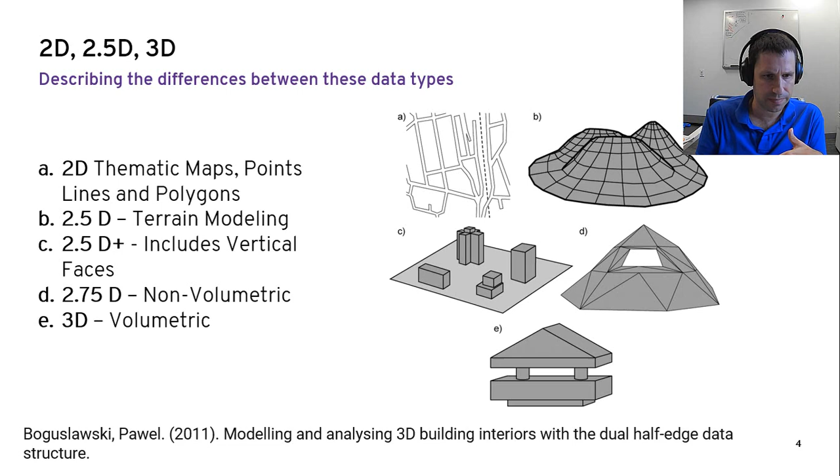Before 3D, think 2D. Imagine having parcel boundaries and just the edges. If you want to check for containment, you have to hope that you have clean data that connects, and two, connect the lines to form a polygon, and then do the comparison. Instead, if you had parcels as polygons to start with, you could compare that much easier. Now let's take this to 3D space.

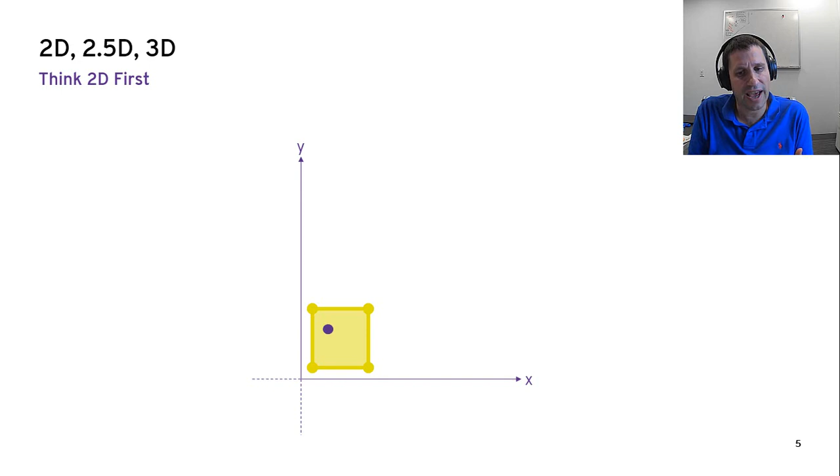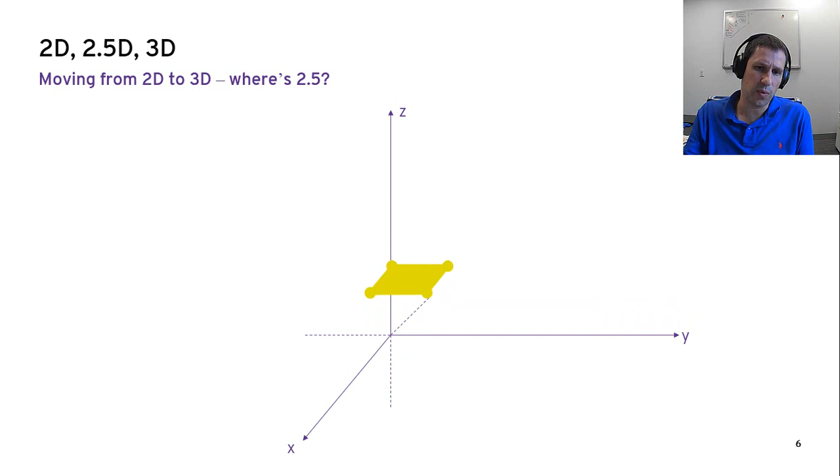Now instead of having parcel polygon versus boundary, imagine a building footprint. On the map, having it 2D is fine. You're looking at it from above. But if we want to rotate our perspective and visualize the building, we can give it some height. So we added a Z value. That is essentially what 2.5D is, a 2D feature with a Z value.

And sure, you can visualize the sides or even cap off the bottom. It looks good for visualizations and has many uses. It's enough for surface models, for example. However, it still has the containment and other feature comparison issues that the boundary-only model in 2D has. So if we had a point, say a 911 call, we'd have a lot of computation to find out if that point is in fact within that 2.5D shell.

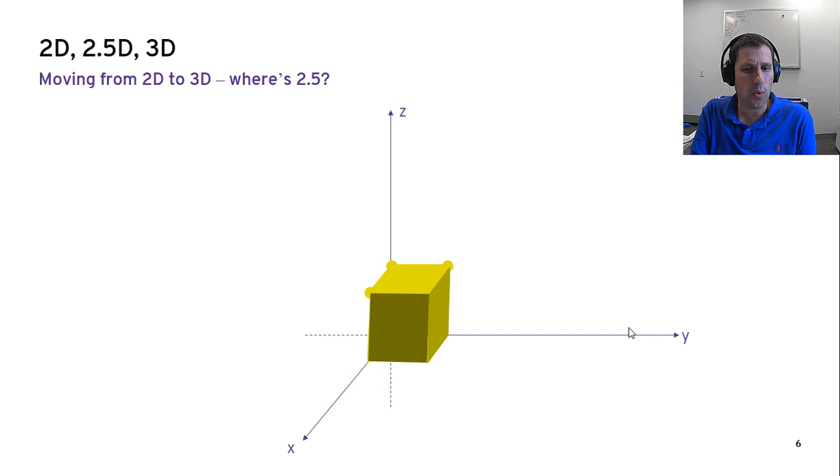That's where true 3D comes in. Full 3D allows for these sorts of comparisons and more complexity, like if we have overhanging roofs, rooms in buildings, and so forth.

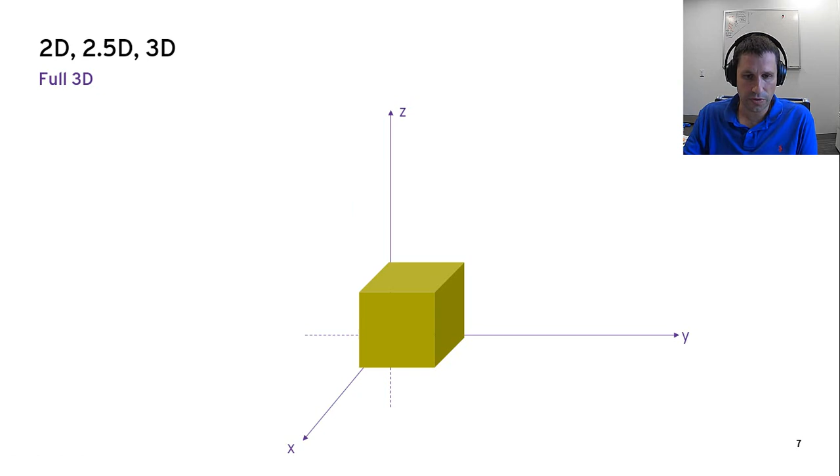Now that we've set the groundwork for what 3D is, let's step back for a second. As I mentioned earlier, 1Spatial has a background in data management, performing validation, integration, and enhancement of data. We work with many customers on complex data management challenges to support data supply chains within spatial data infrastructures or more complex conflation work.

1Spatial, as a global company, has been working on data management solutions for 50 years. While we are newer here in the US, we are growing rapidly supporting transportation, utilities, government, and facility organizations. One of our biggest growth areas is working with organizations like the state of Michigan, California Office of Emergency Services, Minnesota, Georgia, Arizona, and New Jersey, helping with data quality and integration of next generation 911 data.

Which leads me to the use case we wanted to highlight for 3D validation and inference. When we think of current addressing, we have an address point that may or may not be within a building footprint. We've done work helping organizations update the positional accuracy of their address points to actually be within a building footprint. However, what happens when you have multiple addresses within one building?

Organizations manage these situations slightly differently. Some organizations have stacked address points, meaning there are multiple points at the same location with the unit number identified in the metadata. Other organizations distribute the addresses across the building, which gives the map viewer a better idea of how densely populated a particular building is, or in some cases the system just requires the data to be in that format.

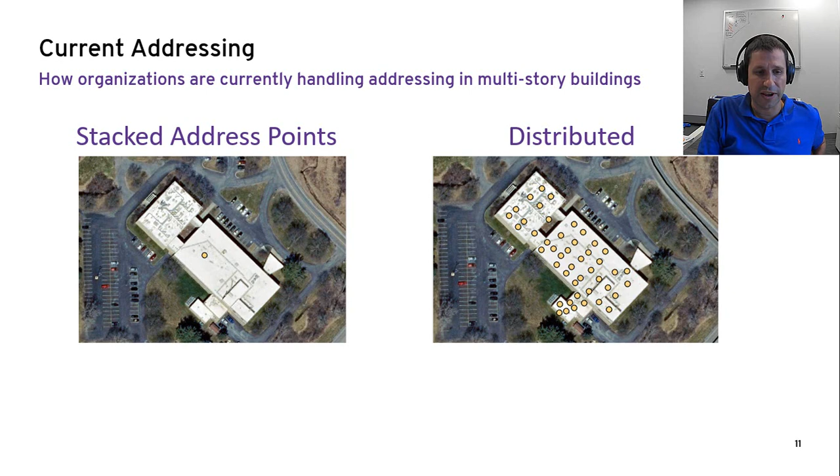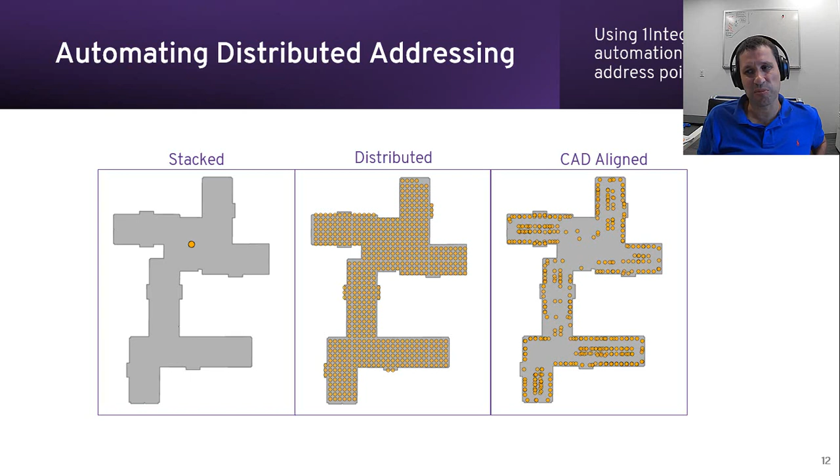You want to make sure the response team shows up to the nearest available entrance to wherever the emergency happens. That's where we can look at some as-built CAD drawings and integrate that with the GIS data in order to get an address point in a more realistic location. So let's talk about how we can automate that, and then we'll talk more about taking this to 3 dimensions.

What we want to be able to do, instead of just representing this as stacked addresses, is put it spatially where those rooms actually are located inside the building itself. Now, that data doesn't exist in the GIS, it exists in the CAD data itself. So let's go to the CAD system and look at the data there.

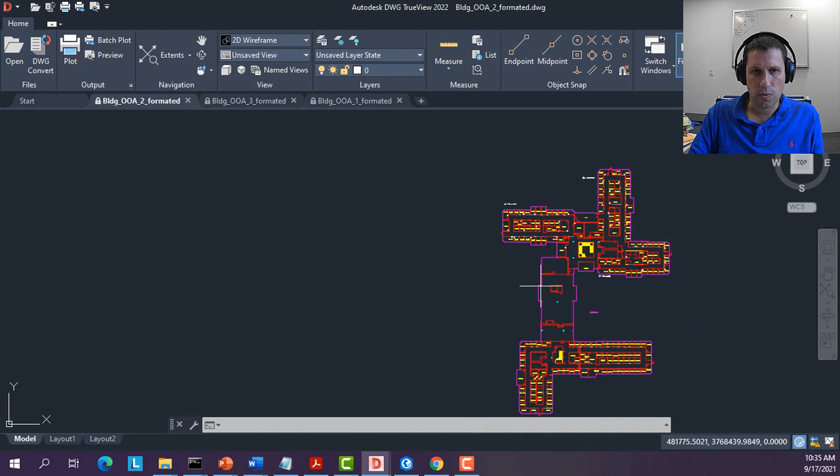So we're looking at our AutoCAD files. We have one for each floor, building floor 1, 2, and 3. If we zoom in, we can see inside that particular CAD drawing we have information on the room numbers, which should also reference back to those particular address points.

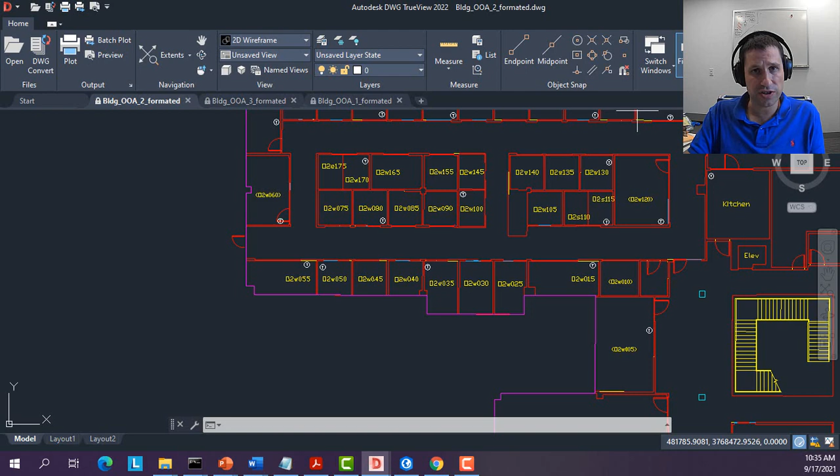Now what we're going to do is use the 1Integrate product to actually integrate these two different data sources so that we can update the address points to those particular locations. So let's flip over now to 1Integrate.

For those who haven't seen the 1Integrate application, we're on the Sessions tab, where we connect to different data sources. We can run a series of business rules against the data, either validate the data or integrate that data source. So I'll go ahead and hit play, and then walk through what is actually happening.

What we're doing is first bringing in the building footprint data set, that polygon. We're going to bring in some of the addressing data, and then bring in all 3 CAD drawings for those different floors. Then we'll run it through a series of business rules to update the address points to that particular location where it's actually located.

Just so we can see what we're working with, let's take a look at a couple of these data stores real quick. Here is that AutoCAD data store, so I'm connecting to that AutoCAD drawing. It's going to bring in the schema of that AutoCAD drawing, and I can use that to write the rules to update the location. So if we come back over to my session, let's show where we're actually moving the address points. So we're coming over here.

We're basically saying for a given address point, if the room IDs are the same, move the address point to the particular location. Pretty simple stuff. Then we can write that result out and come back over to the GIS application, and now we have our address points located where they're particularly at.

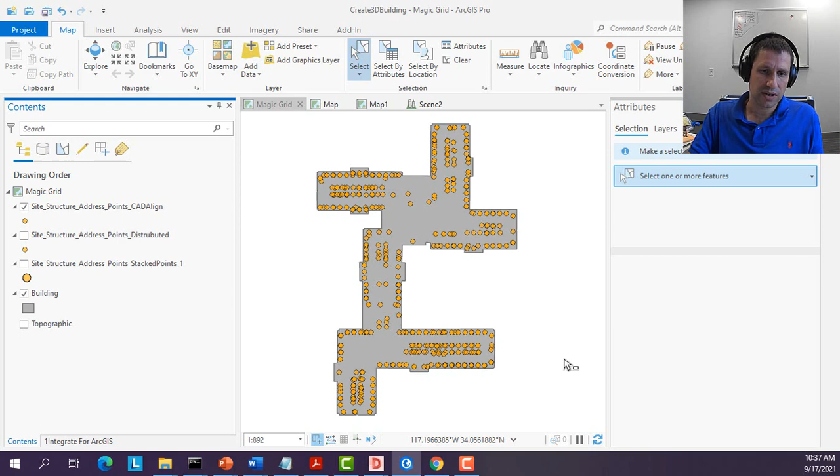This is nice because we at least know generally where those rooms are located, but this doesn't help us with three-dimensional space. So let's talk about that next.

The main reason we're here today is to talk about 3D data. Just like the last case I mentioned before, the same can be said for multi-story buildings. Which elevator or stairwell do you use to get to an emergency?

I pulled this image from a presentation given at the 2021 NENA conference, where Richard Kelly, among others, presented on this particular topic. They are all members of the NENA committee on 3D.

This presentation was talking about the need for 3D data in call dispatch. I mentioned earlier that it's an extremely heavy lift for organizations to get their 2D data in order for next generation 911. So how are organizations actually going to do this work for 3D?

To be realistic, it is not feasible to do this in a manual way. This is going to have to be automated. So let's talk about how we can leverage 1Integrate's 3D capabilities, similar to what we did in the last example, but now let's take this to 3 dimensions.

What we're going to do is take the GIS building footprint data set, and in there we have information about the height of the building and how many floors there are. We have AutoCAD drawings that identify where rooms are particularly located. We could load that all into 1Integrate and infer where these particular rooms are going to be located using that 1Integrate 3D engine.

Beyond just doing that, we can also do additional validation checks to see if we created any sort of spatial issues within the data set itself when doing this automation work.

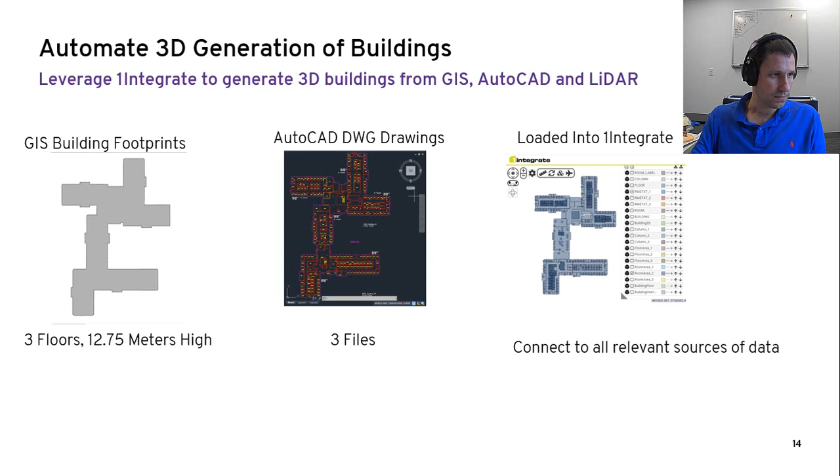Just like in the last example, we have this same building footprint data set. If I select that building footprint data set, it's going to tell me the number of floors, and it's also going to give me information on the building height.

So I can use that information to infer how high the data set is going to be, and how big each particular floor is.

Back to the same thing with the DWG drawings, the AutoCAD drawings, we have information on where all the actual rooms are located. So we can combine these two different data sets and actually infer the entire three-dimensional model of the particular facility.

That facility is located, and then lastly, we can then technically move our address points into the actual facility location. But in reality, once you get to a true three-dimensional model CAD system in a dispatch system, you don't even necessarily need those address points anymore.

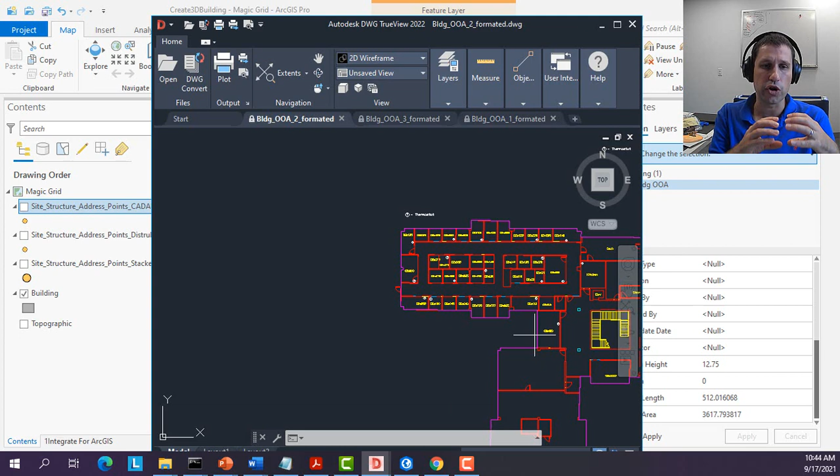You can just say, well, if the call is occurring within that cubed area or close to that cubed area, you know which room it's actually located in.

So let's go ahead and now flip over to the 1Integrate product again, and walk through what's actually going to be occurring here. I now have a couple extra data stores - I'm going to bring in those AutoCAD data sets like I did before, and I have that GIS data set.

I'm bringing in an Oracle data store. This is where I'm going to write the data out to, because I want to have my three-dimensional data written into a system that supports true 3D, which Oracle Spatial does.

Let's go ahead and select this particular data store. What you'll notice here is that for those that have 1Integrate with the new 3D functionality, which is an extension to 1Integrate, you have this checkbox, enable full 3D. This enables you to actually create and generate true three-dimensional data sets.

So let's go back over to my session now, and I'm going to go ahead and just fire this off. We're going to connect to that Oracle data store, and we're going to bring in that GIS data set.

We're going to bring in those 3 AutoCAD drawings, do some generic cleanup, and extrude the building footprint. So the building footprint now is a three-dimensional feature with actual volumetric information.

We're going to take each floor plan and move that floor plan to where it's actually located in three-dimensional space, then extrude those. Then we'll do the same thing with the actual room information.

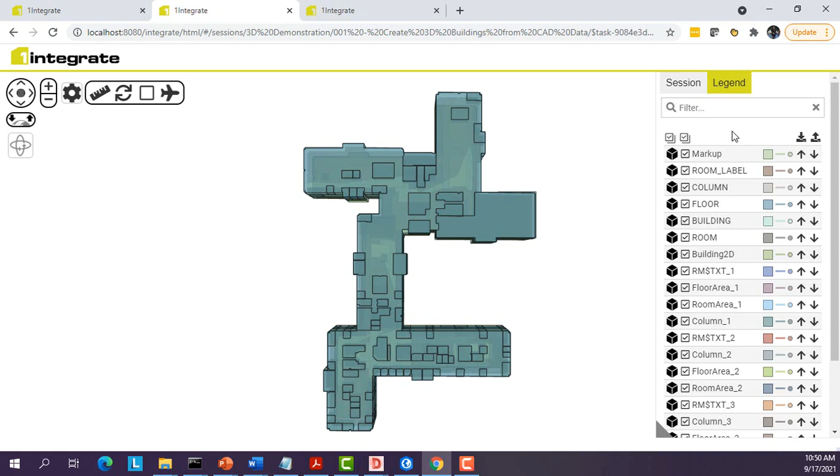Within 1Integrate's application, we now have true three-dimensional representations of the data. We have true three-dimensional visualization now too within the 1Integrate data viewer.

So let's start from the beginning of the session, where we connect to our different data sources. We have our building floor, we have the CAD data.

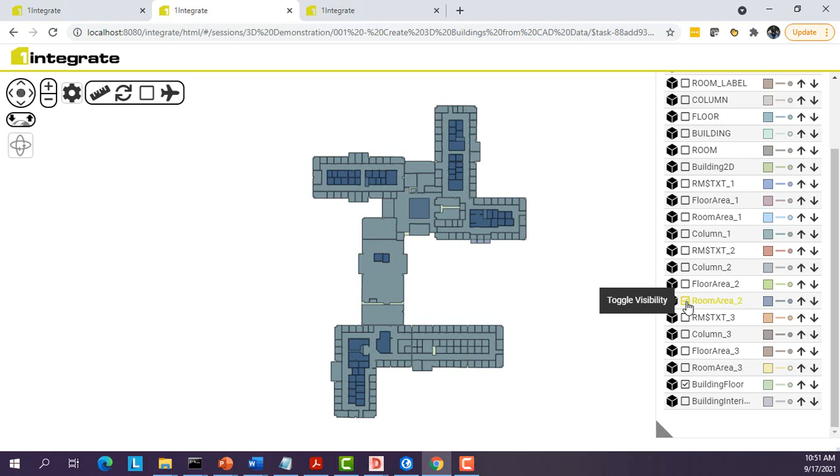So we have stuff like the rooms for each floor, this is the room area for the second floor, we have the rooms for the first floor, and we have the floor area. Notice the floor areas are not the same, since it's not necessarily the footprint of the data set, and they also don't necessarily always align.

These are things I mentioned before that we're going to have to eventually clean up before moving this into a production level data set. Now we have the CAD information and the GIS information in the same geospatial space inside the engine, so we can actually do the three-dimensional work in the data set.

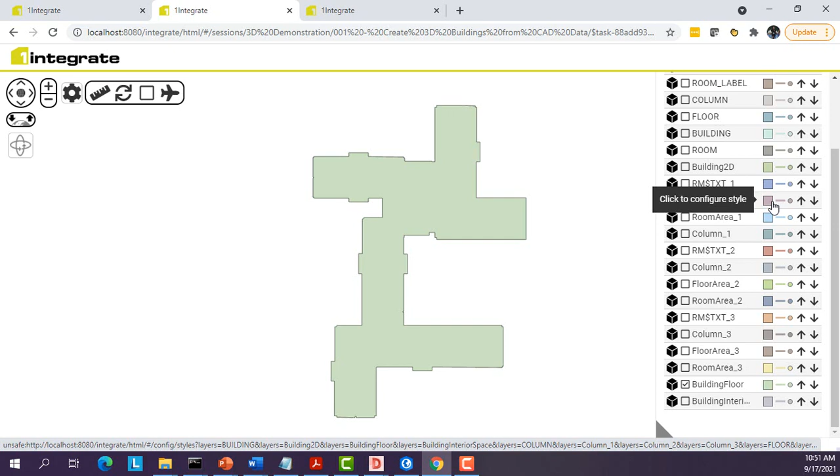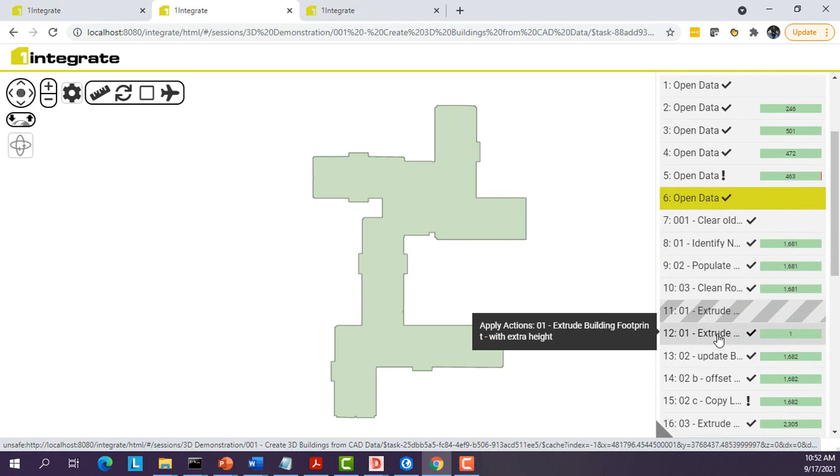So the first thing we're going to do is extrude the building footprint based off of the height of the data. Now we have a building footprint that's extruded here. Let's see if we can work on a good angle.

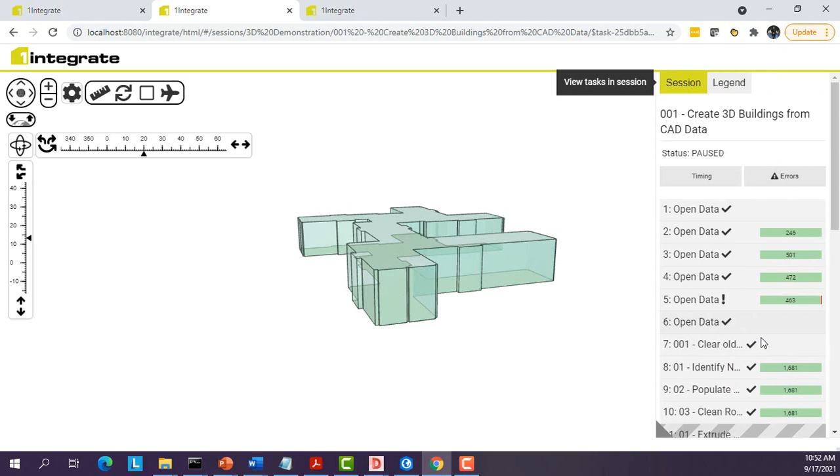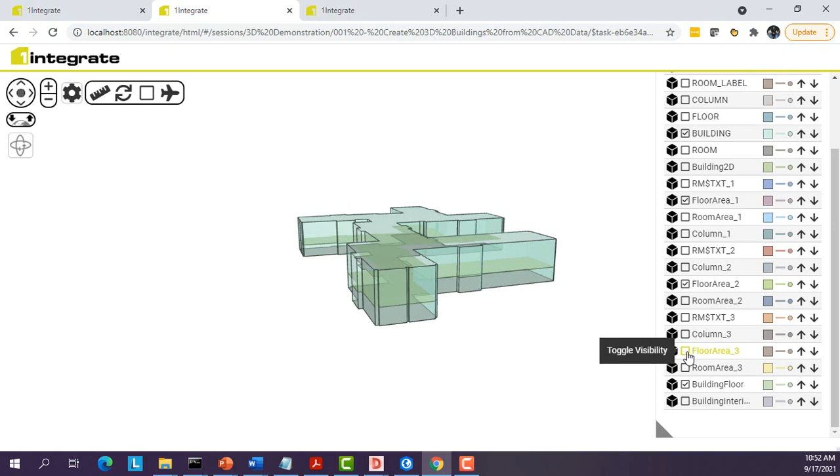The next thing we're going to do in the session is offset the actual heights of the different floors. So now if I look, my floors should all be where they're actually located. Now the floors are all where they should be, but they're still 2.5D at this point, they haven't actually been extruded out.

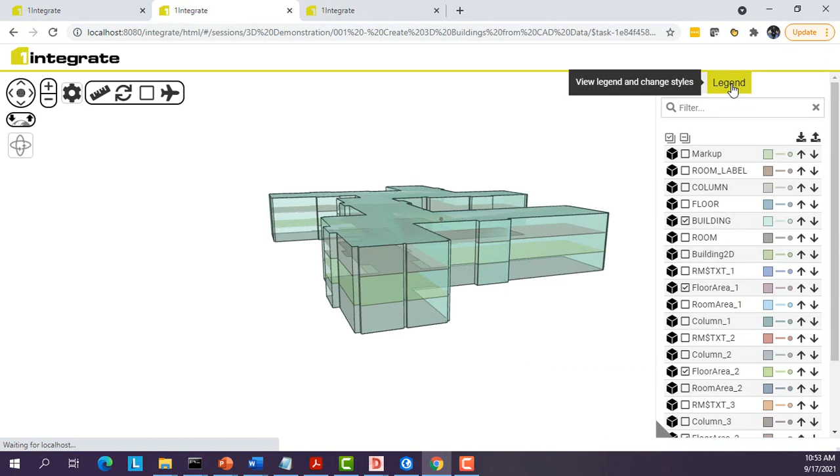So that's what we do next, we're going to extrude the floor objects. Now when I turn on my floor layer, and let's turn off the building one so we can see what we're working with here, I'll turn off these original CAD 2.5D layers. So now we actually have 3 floors.

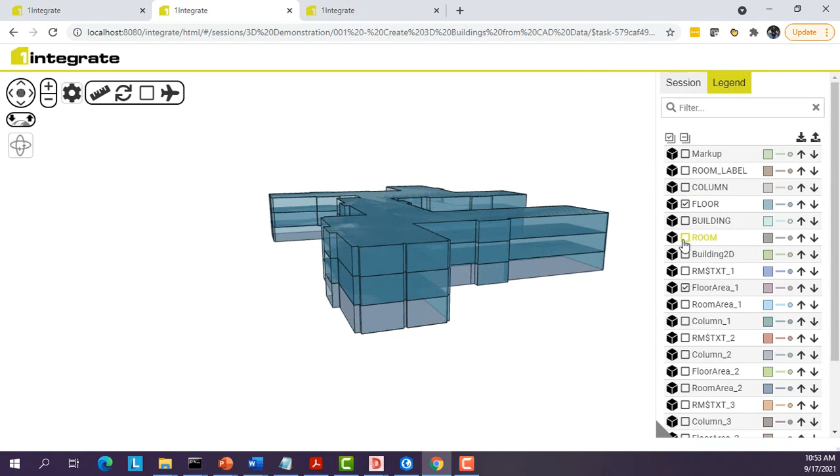Then we could do the same thing with the room objects. So when I come back over to my legend now, we have actually all of our rooms in three-dimensional space.

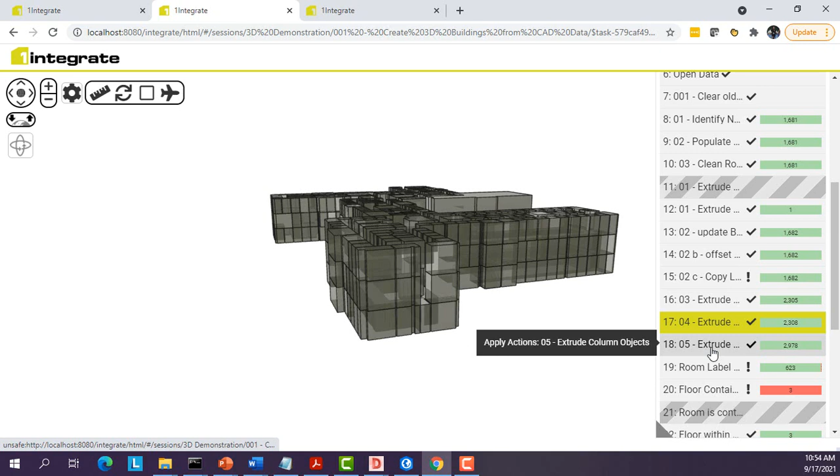What we also do is we have columns and so forth in these CAD drawings, so we could even extrude out those columns too.

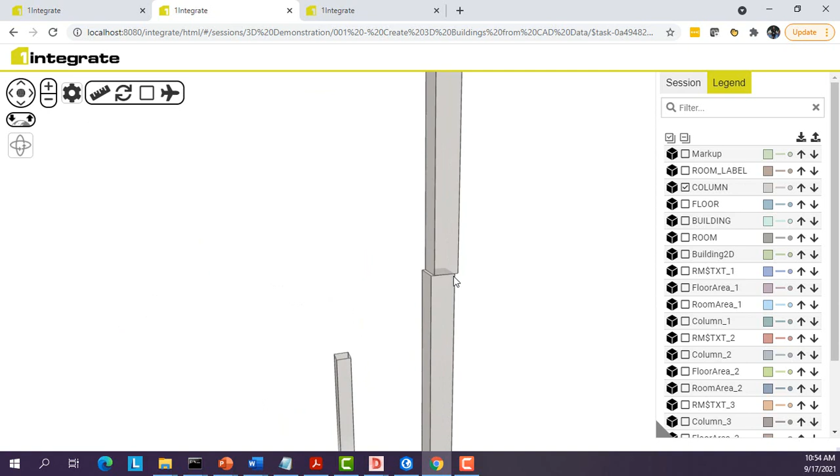Now what's interesting about the columns is when we extrude those out, and if I look at the data set, we're going to notice that things don't necessarily align quite right, because between those two different CAD drawings, they weren't exactly aligned. So some of the work we're actually doing for Google right now is making sure that for each individual CAD drawing, as you stack them up to each other, that the different elevator shafts line up, the columns line up.

The stairwells line up the way they're supposed to, so doing that alignment for multi-floors within those CAD drawings. We're working with Google doing that so that you don't have things like this occur when you're trying to bring in the columns. We're trying to make a three-dimensional representation of the columns and so forth.

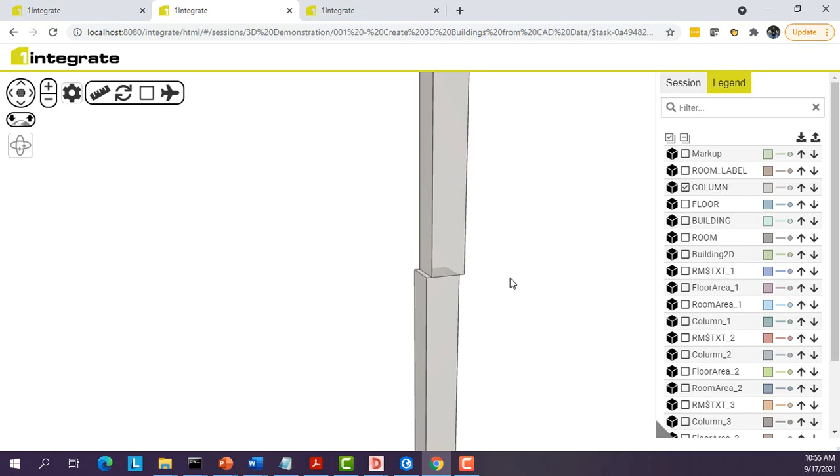And then what we also have, let's go back over here, is we also have the address points too that are now in three-dimensional location. So all the address points are actually within the rooms themselves.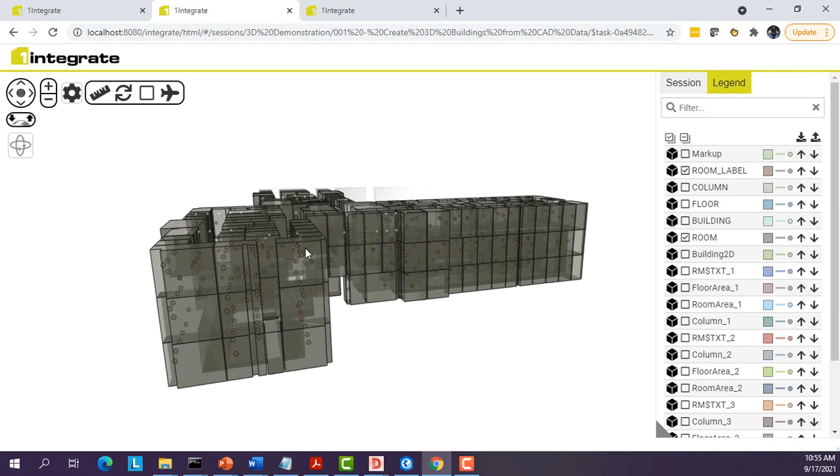And the main reason I did this is more so to say, well, if there was a call that came in from one of these particular locations, you now can do a check to say, is that particular call within that particular room? And then what we did is we also cross-referenced now all these different address points with the actual 3D spaces to make sure that any given space has an address point.

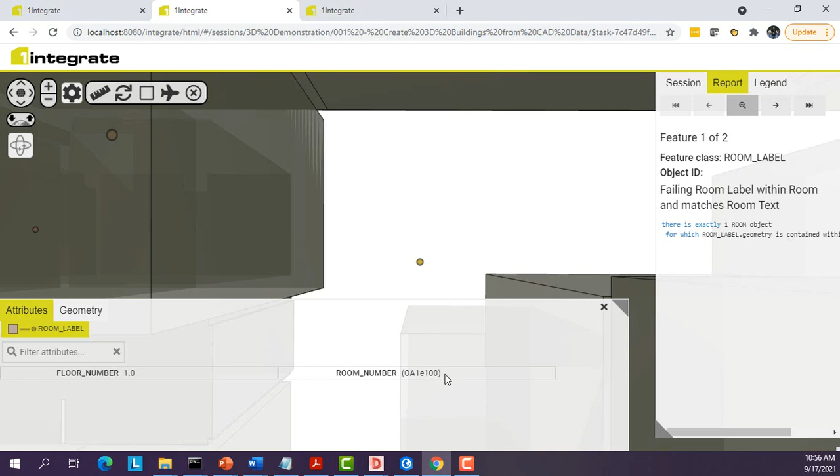And if we come over here, we found there were 2 rooms that didn't actually meet that. So here we have an address point that doesn't have a particular location at all. And actually the reason why is because it has parentheses inside the room number.

That's why it's not matching. And this is another example here where there's parentheses. If there weren't parentheses in that particular room number, it probably would have found a match.

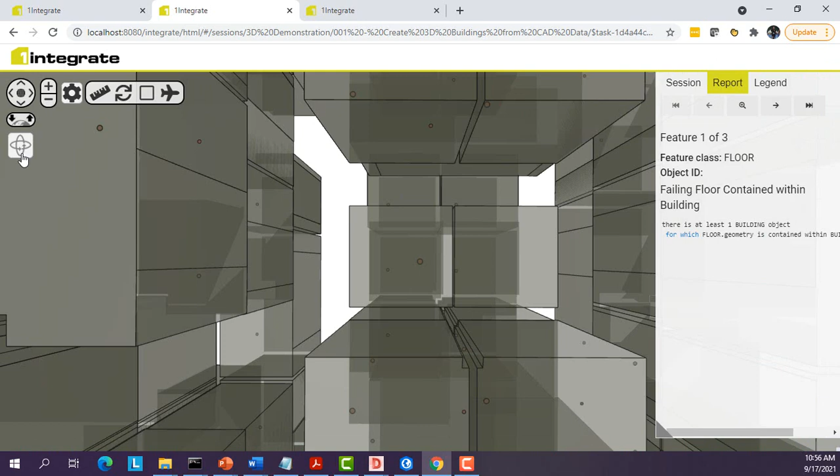And the last thing we did was say a floor must be contained within a building. So in this case, we have all of our - let's go back out real quick - all right, so we have the floors in the buildings, and we can do a validation check to say that the entire floor is contained within the building footprint.

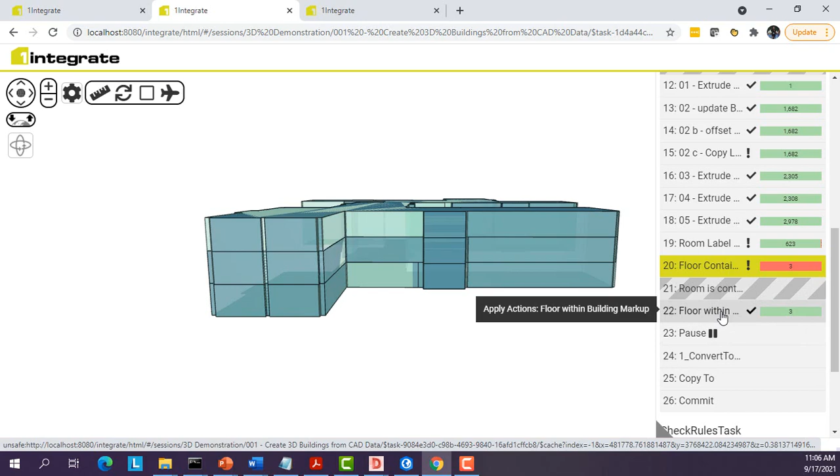But beyond just doing that validation check, we can also do a markup on identifying where those particular overlaps are occurring. So let's go back over to my session, and let's do that where we mark it up, and let's turn on that markup, and let's turn off the other layers.

So we can see where all these particular slivers are located. These are all the different slivers on where the actual building doesn't contain the floor, or the floor is not contained within the building itself. And all that, just like we could do a point markup, we can also mark that up on the building. So we can automate the process of generating these three-dimensional features.

Not only that, we can also validate that objects are actually contained within those volumetric information. So doing those volumetric validation checks is something we can also do now within OneIntegrate.

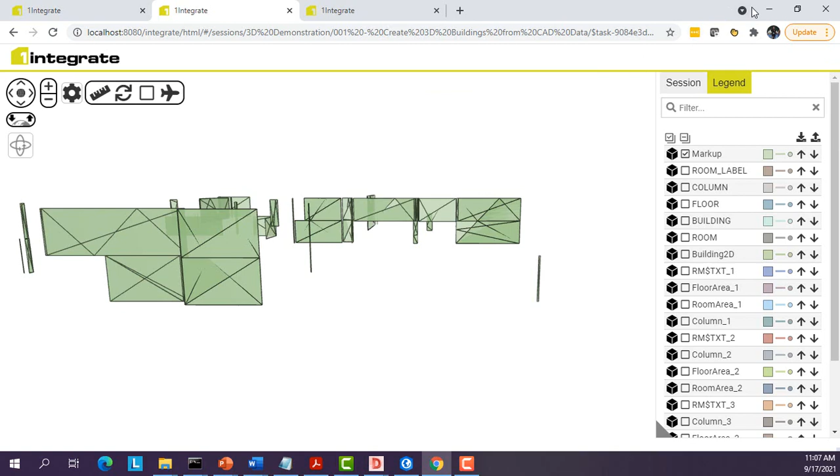So let's go back over to the slide deck. As I mentioned before, we automate that process of doing that 3D generation, leveraging OneIntegrate. So we can extrude the buildings out, extrude the levels out based off of the metadata that's inside the building footprint, also leveraging the AutoCAD information, and then use that to create these three-dimensional models.

Now, these three-dimensional models can be used for next generation 911. They can also be used for facilities management, among other use cases.

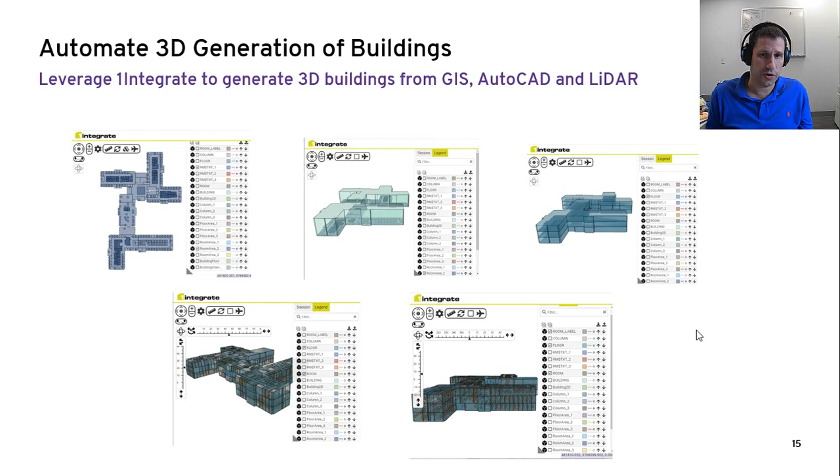And actually, that's where it leads us to close out, is that this may not necessarily be something that your organization is either ready for or interested in on that next generation 911 side, but are there other 3D use cases that could be valid? And that's what we would like to know, because this can also help us gear where we're going to put our development resources in, to know what types of use cases where true 3D validation, inference and integration could be useful for you.